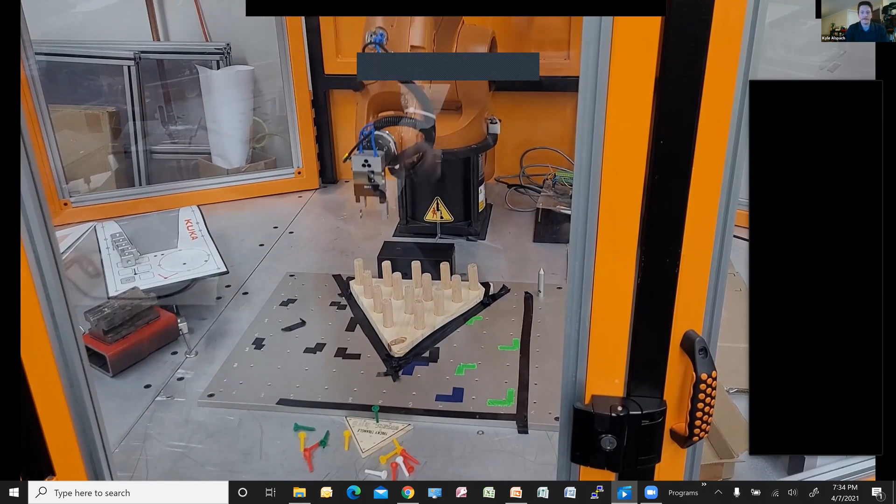Hello, folks, and welcome to the Winter 2021 Robotics Championship. I'm your host, Kyle Allspa. We are coming to you live from the Robotics Lab at Oakland University, where we had the last match of the semifinal round. Let's get into it. The semifinal round is a puzzle round where the robot arm must solve the tricky triangle puzzle.

Kyle, you have to unmute your mic.

R700 is off to a great start, working through the top half of the puzzle first to make room for the bottom half, a brilliant strategy. Now keep in mind, folks, the KUKA absolutely needs to end up with 1 peg left on the board in order to beat out the FANUC arm and advance to the final round against ABB. The KUKA robot makes it look easy, though, just gripping away and putting those pegs down with authority. It doesn't fear a yellow painted robot arm. It doesn't need to say anything. Its moves are doing the talking.

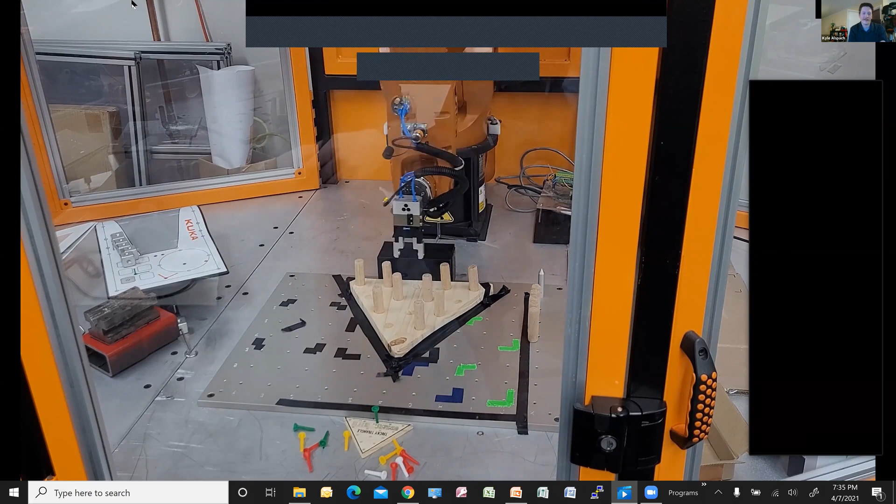They're saying, you better be scared, FANUC, and I'll be seeing you in the finals, ABB, moving with precise, fluid motions. The KUKA is absolutely just crushing this semifinal round. It's saying, oh, this challenge? This is just another day in the office for me, chief. The KUKA is just blowing away the competition, leaving everything in its dust. It has no remorse. It will not apologize to no one, man, nor robot.

Group 6 is feeling confident their robot will end this round with the win and face their rival, ABB, in the final round. They have come a long way to get where they are at, so failure is not an option for them at this point. Coming down to the last few pegs of the puzzle, it is looking like a real nail-biter, folks. Will the KUKA get to the coveted one peg left, or will FANUC get a chance to force a tiebreaker between the two? Time will tell with these last few moves.

Leaving nothing to chance, the KUKA makes it apparent that it knows what it is doing. This last jump means that the KUKA has just won the semifinal round, and boom goes the dynamite into the last slot. The peg goes. The crowd is cheering. The KUKA knocks down the pegs like dominoes.

Well, that's it for us here today. Tune in tomorrow night to watch the Robotics Championship final to witness KUKA and ABB duke it out in a game of Rock'em Sock'em Robots to determine the winner of the 2021 RoboCup.

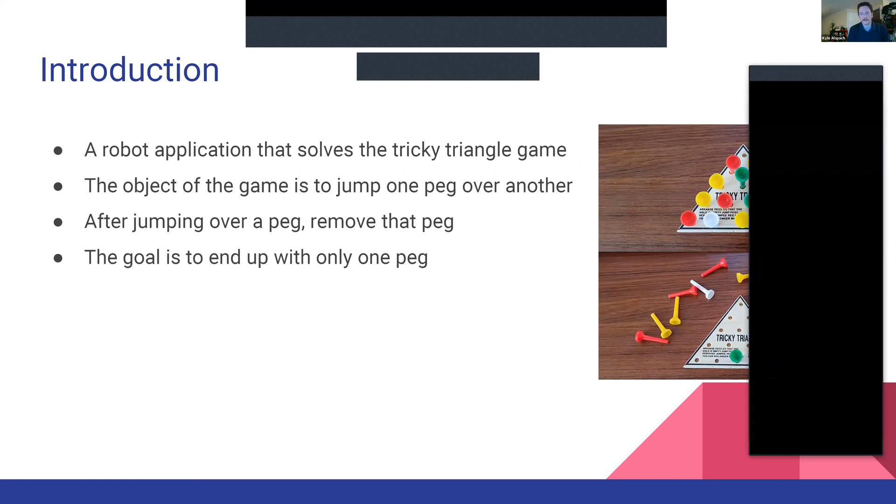So a little introduction. If you're not familiar, the tricky triangle is a small handheld puzzle with the goal of jumping pegs over each other into empty slots and removing those jumped pegs, ultimately ending up with one peg left. You may have seen this game from your grandparents, or maybe if you've ever been to Cracker Barrel, those games are always on the table.

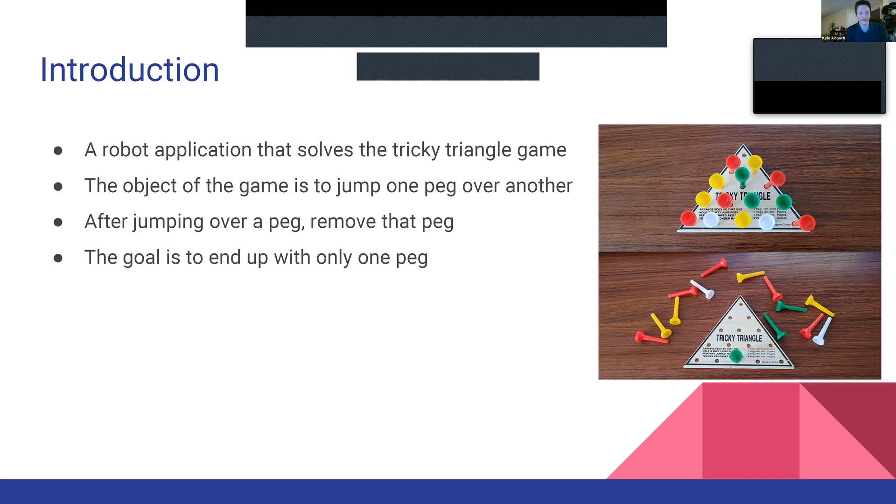So with that, the goal was, how do we get this into an application where a robot such as the KUKA could easily grip each peg and put them down. So we decided to blow it up to a decent sized board where the robot arm could easily maneuver through pieces and the gripper would not get in the way of each peg.

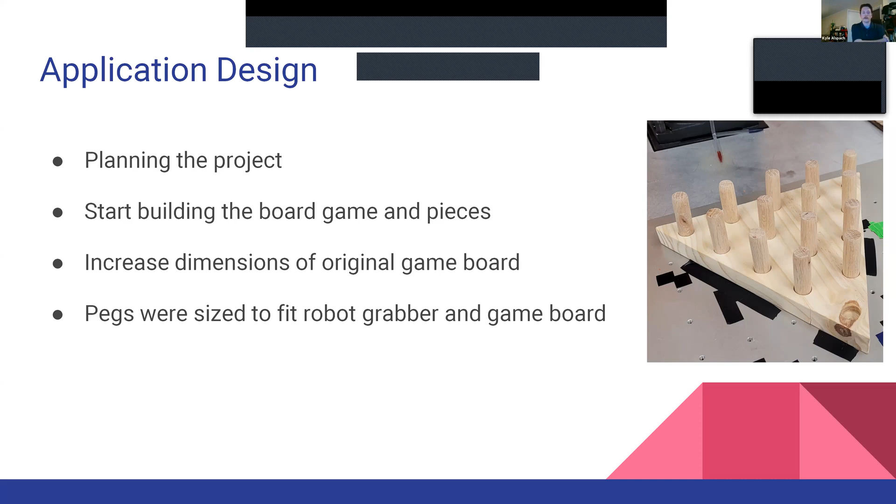And so with that, we went to the hardware store, drilled 15 holes as symmetrically as possible given our tools. You'll see later on how this rough iteration of the game board caused some issues with repeating the process once we got down with the programming. So with that, I'm going to turn it over to Lucas.

Yeah, so for programming the robot, we started the KUKA robot at the home position, and the movement was controlled by the teach pendant. We moved the robot arm in the world frame from peg to peg, and every single one of those moves was a specific position that we had to save at every single point — like when it went over the piece, when it went down by the piece, when it grabbed the piece, lifted it up, over, down. It was pretty tedious, making sure we saved all those pieces.

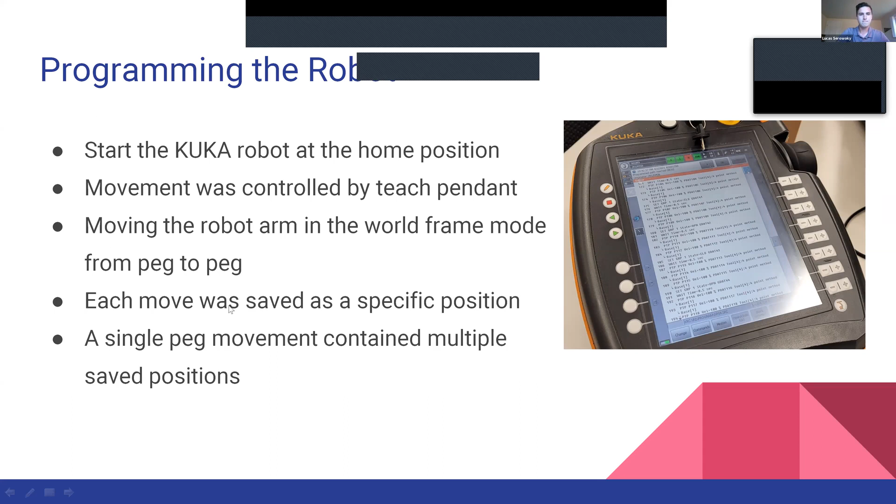The tool piece is kind of like a horseshoe shape. And when you're grabbing it, it was kind of like grabbing with chopsticks at first, because on the lower part of the tool there were some screws on the inside. When you grab the piece, it would rock back and forth — it wouldn't necessarily always grab the best spot inside of there.

After trying it out a couple times and saving all the code, we finally decided it would be better off to use the upper half of the tool piece, which was squared off, and that made it uniform. So every single time we went over to grab the piece, it would make sure we grabbed it from the same spot every single time.

Some of the board tolerances — Kyle's a great woods craftsman, but it's not perfect doing it by hand for every single one of those pieces. He thought about even getting a drill from Harbor Freight or something, but decided not to. We had to tape the board down to prevent it from moving around when we were grabbing each of the pieces, and quite a bit of time was needed to complete the puzzle.

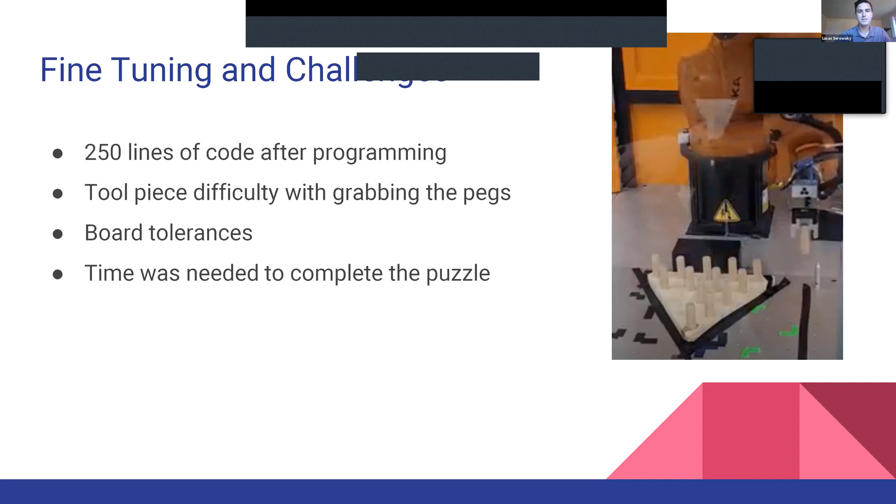Next slide, please. Yeah, so for executing the program, there are many different ways to solve the tricky triangle game, but we used the most popular solution, which involved the least amount of steps. So, for example, we numbered each of the pieces and said, like, piece 1 jumps over piece 2, take out piece 2. Throughout that whole process, we had to save every single one of those spots.

And like in the real world, there's always difficulties. You just gotta go with the flow, adjust, react, and be able to solve the problem at hand. For the KUKA robot, we all enjoyed working on it. It's very straightforward, and it was nice with the XYZ, being able to go left, right, front, back within each of the frames, going from forward kinematics to inverse kinematics, grabbing each of the pieces and stacking them all up in line so we could finally knock them all down.

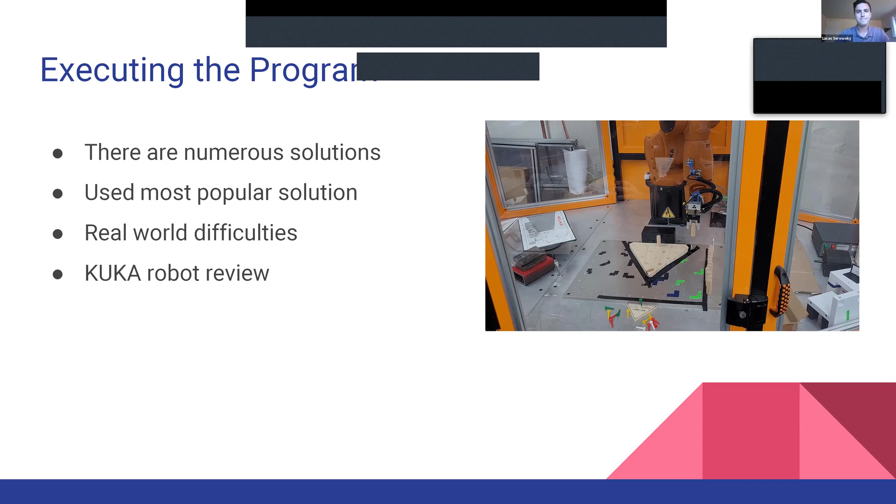So I'm going to talk about improving the application. After finishing the project, we went back and talked about what we could have revised about the building process.

The problem was, as we mentioned, the board itself. It was not built with a good tolerance. If we had more time, we could have built it with better tolerance and reduced the difficulty of movement to set up the peg in the right place.

Also, the speed of the robot was one of the problems we had. If the speed of the robot on manual control was as fast as it was on auto control, that would ease up the movement of the robot to solve the game. While we were programming, we used manual control, but when we tried the whole process, we used auto, and it was a completely different speed. Like when it was set to 100 speed, it was still slow on manual, but when we switched it to auto mode, that made it way easier and faster to solve the game.

Another point is the point of view. If there was an option of adding a camera on top of the gripper, or a camera over the work area, that would ease up the vision of the movement, because our problem was that the hole was so small, and as we mentioned, we had trouble fitting them together. So while the robot was moving, we had trouble seeing where the gripper was moving and if it was in the right position to set up the peg in the hole.

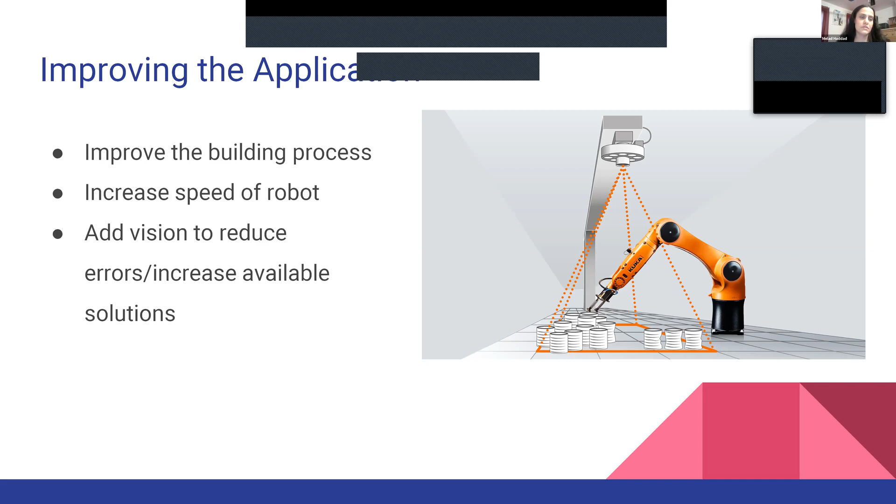At the conclusion, the way we pursued the program gave us a better understanding and good knowledge of how robots work. During the process we passed through some challenges as usual, but in the end the application was accomplished. The project was a great observation of how to approach a program using a robot in a real world situation.

Overall, it was a great opportunity and a nice experience to be able to create an application from scratch and use a robot to solve it. When we started, we just had an idea, we built it up, went to the lab, tried many times, had some difficulties, and ended up finishing the project with a really good experience and a nice learning outcome. That gave us a really good vision of how we can use the robot in any application we can think of and resolve it, whether it's small or big.

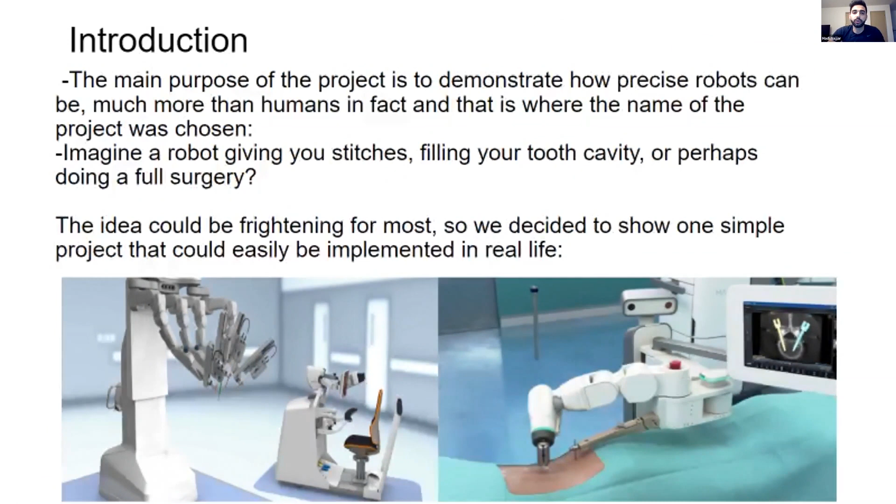The main purpose of this project is we wanted to prove once again that robots are much more precise than humans are. I know you all trust driving a car or whatever, but how about thinking about someone other than a human being giving you stitches, or a robot digging in your mouth filling a tooth cavity? I know it might not sound very pleasant, but we might change your mind after showing you this project, hopefully. So we decided to show you one simple example, and we're going to tell you what we'll be mimicking in a second.

One of the main reasons we thought of this project is because we realized that medical mistakes are actually the third leading cause of death in the United States. Part of these deaths is due to imprecise usage of medical equipment by surgeons while they're doing the surgery. So we wanted to talk about this before we show you the video demo, just so you can relate to what we're talking about.

The project we're doing kind of mimics what's called an angiogram. An angiogram is pretty much a catheter that's inserted into the blood vessels, mainly the arteries, and it goes all the way to a certain part of the area. It's very common in the heart. This type of angiogram has a catheter that goes in and navigates through the blood vessels all the way to a certain place, and then the surgeon has to pull it back out. If you look at this simple figure, you can see how long the actual path could be. And when working on a smaller scale, like micro or nano, this becomes much harder to be precise. So you can imagine how precise someone has to be and how steady the catheter has to be going in and out.

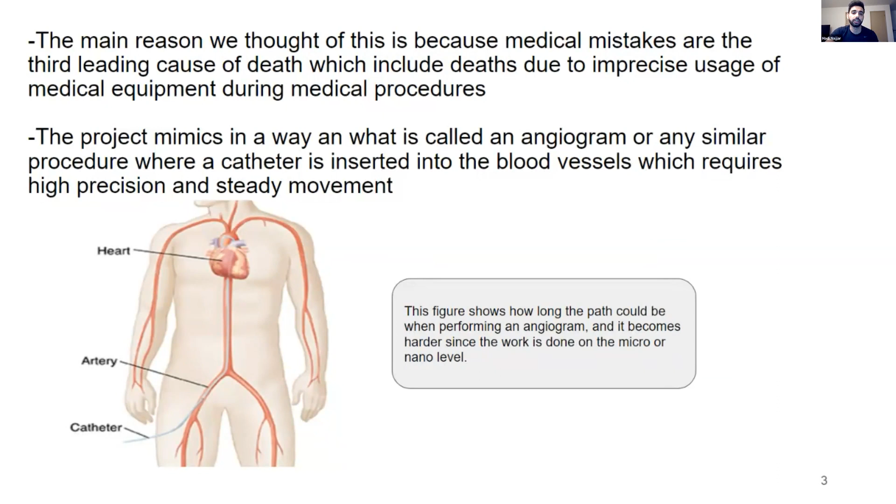So like we said, we decided to mimic this in a way. We had two main parts of this robot: a tool with kind of a spiral and linear shape that's guided through a ring that's steady in its place. And at the end of it, we decided to put some dominoes and knock them down, just to prove our success, I guess. So we're going to go ahead and show you our demo to show you how this robot is going to work.

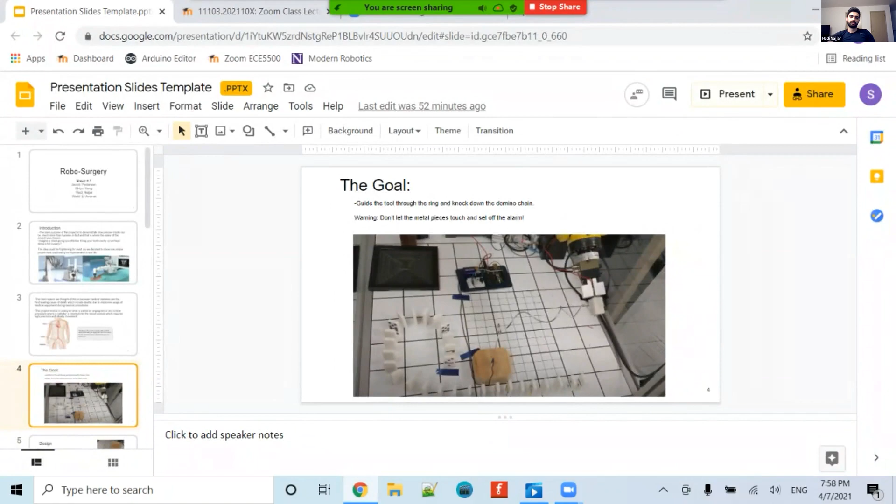All right, so that was our video. I'm just going to talk to you guys a little bit about the design, kind of what went into the background of getting this to happen.

You can see in the picture on top, there's our tool on the left and the target on the right. The tool is basically a piece of wire bent with a spiral and a zigzag, which we had to guide through the ring. And you can see in the picture on the bottom that the tool is mounted at a 90-degree angle to the last joint of the robot.

It took a little bit of playing around to figure out how to hold it so that we would have the most flexibility, so that we could avoid the singularities while guiding the tool through the target.

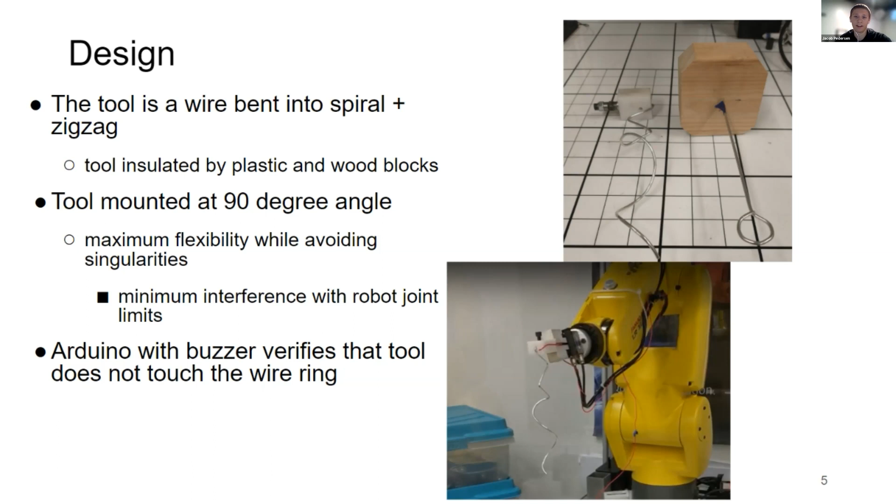Also, if you notice in the picture on the bottom, the red wire running from the tool down to the base of the robot is connected to an Arduino, which is hooked up to a buzzer to verify that we don't bump the tool to the ring as we go through. Also, you can notice how the tool has a plastic block to insulate it from the robot.

So here's just kind of a flow chart of basically what our program does. We start in the home position, and then we bump the tool to the target to make sure the alarm is working.

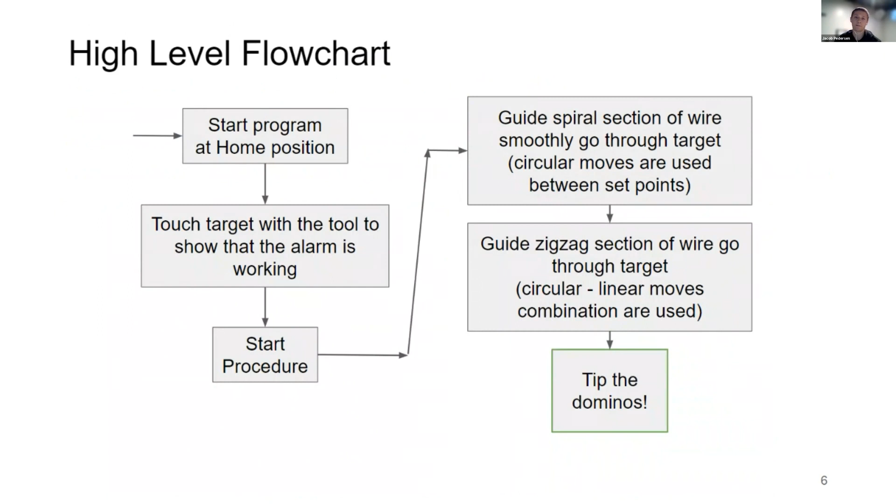As we start the procedure, we use circular moves to guide the wire through the curved sections, and then we use straight or linear moves to guide the straight sections through the ring. Once we're all the way through, we can tip over the dominoes.

So how we programmed this: basically we just had to manually drive this tool through the ring with the teach pendant and record lots of points, as you can imagine. Like I already mentioned, we used linear moves for the straight sections and circular moves while going from point to point, changing orientation through the spiral.

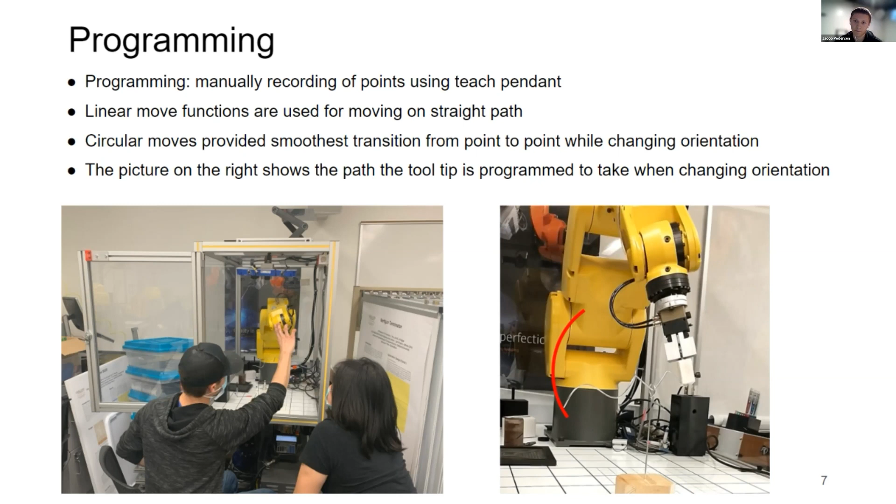The next will be the code that we use going through the spiral section. As you can see, most of it is us using the circular move.

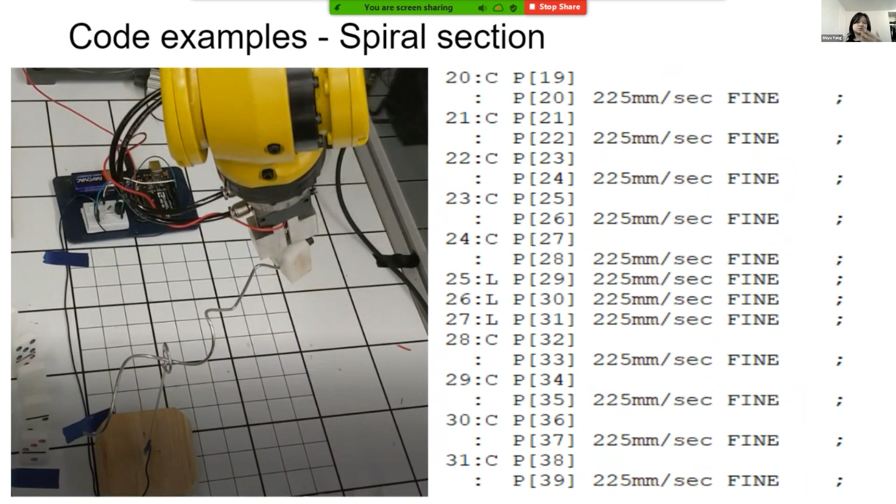And the next one will be the zigzag section. We pretty much use a combination — rotating from linear move to circular move, and then circular back to linear, stuff like that.

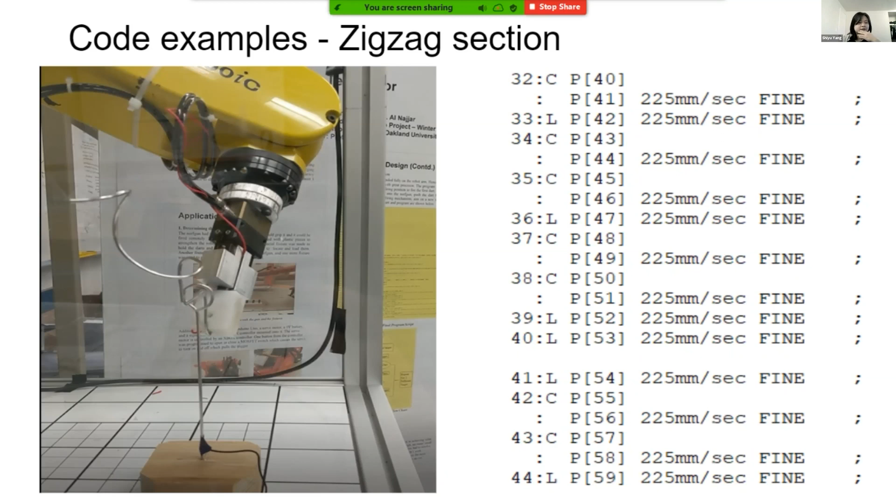And these are showing all the positions that we programmed. We skip a little bit, but you can see from point 1 all the way to point 59, we have so many points programmed.

So as an observation, I believe the demonstration video pretty much shows that the robot motion is very smooth, precise, and stable, as we do hope this can be a real medical application.

Setting multiple points in circular motion works just great for nonlinear path scenarios, like what we did for the spiral. Also, changing the tooltip points helps the robot move more precisely around a specific center — that's actually what we did for the zigzag section. We just end up rotating around where it turns.

And also, due to the robot's joint limits and singularity, the initial position of each joint must be carefully considered during the design phase, just to maximize the running distance along all directions and the rotating angle of each joint.

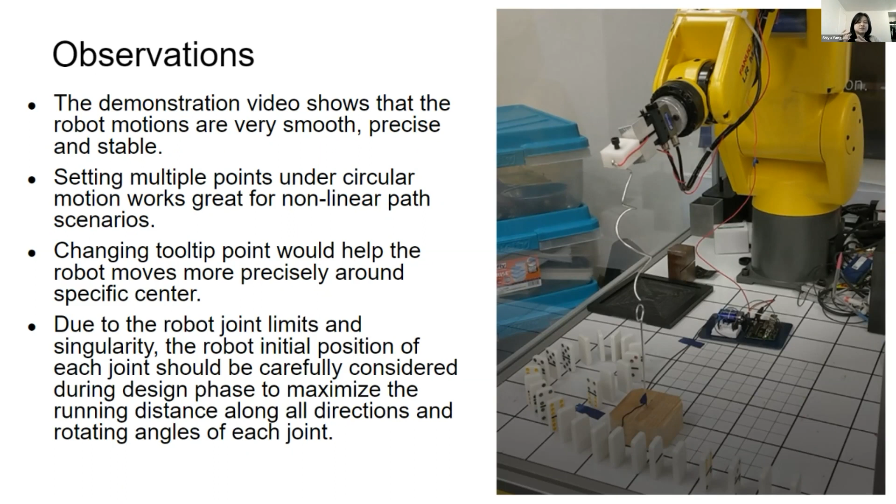All right, I'm going to pass it to Valid.

As a conclusion, we can say that we were able to achieve the main purpose, which is to guide the tool through the ring and knock down the dominoes chain. The project shows high precision and accuracy when entering the wire ring.

This project helped us apply the concepts we used and learned during the semester, and gave us the opportunity to get familiar with the use of the teach pendant. The project emphasized the idea that robots can be easily programmed by saving the points of the desired path to automate the process.

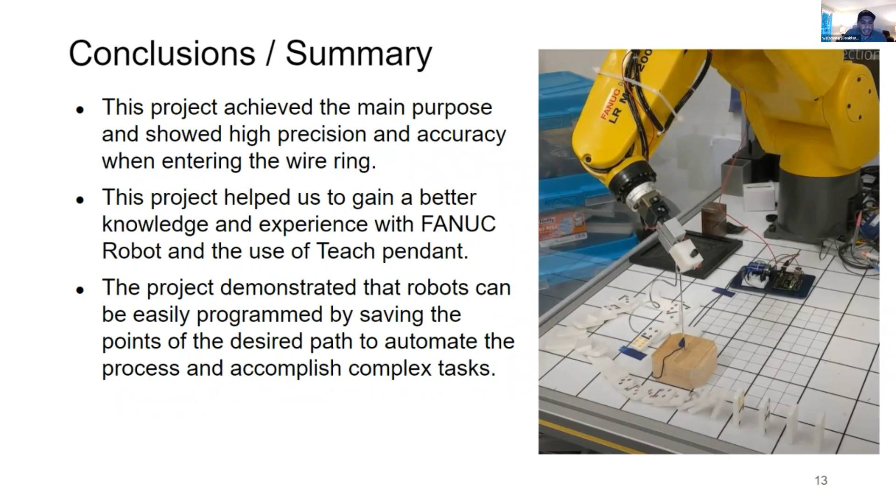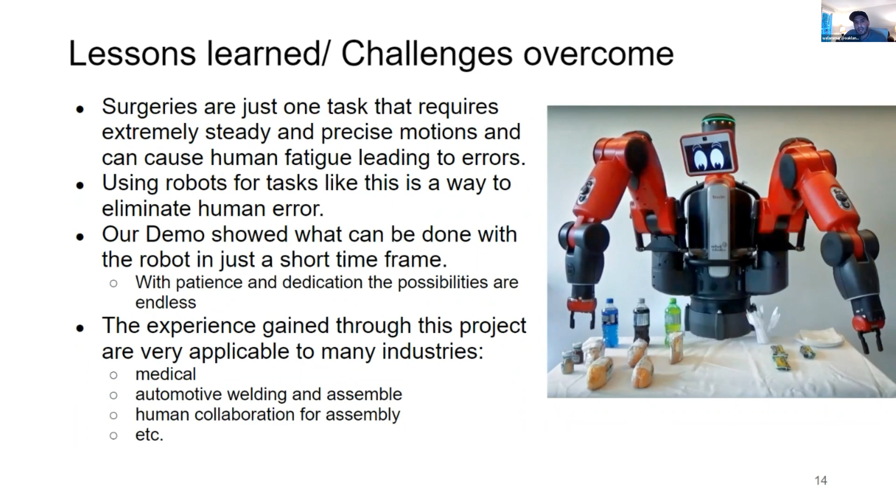Some of the lessons we learned and challenges we overcame during the project: using robots for complicated tasks is a way to eliminate human errors and mistakes that can occur, and robots can accomplish many tasks in a very short time frame. Finally, a lot of experience was gained during this project, and it can be used in many industries such as the medical field, automotive welding and assembly, and human collaboration for assembly. Thank you guys for watching, and any questions?

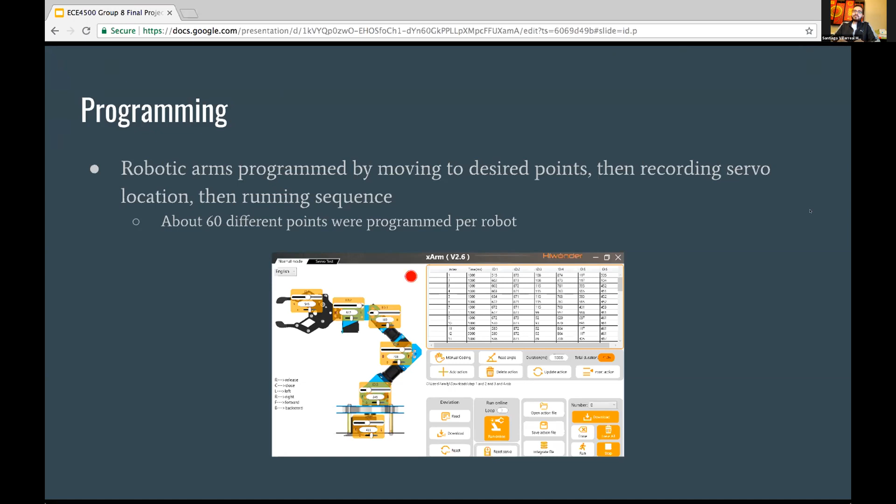To program the robotic arms, we use the software that came with these robots. To program each robotic arm, we move the arms to the desired points and then recorded the servo angles in the software. Then we just ran the sequence, making sure to include all the delays necessary for each arm to make each chess move. In total, we recorded about 60 different points for each robotic arm.

The workspace for these robots was a 9x9-inch chessboard. Originally, we wanted to use a bigger board, but due to the size of the robots, we had to stick with a smaller board, which made it a bit challenging when trying to pick up the pieces without knocking over the other pieces on the board.

We didn't make any modifications to the end effector tool. We thought we might need to add some half cylinders to the grippers, but the gripper in the robot was sufficient to pick up all the pieces.

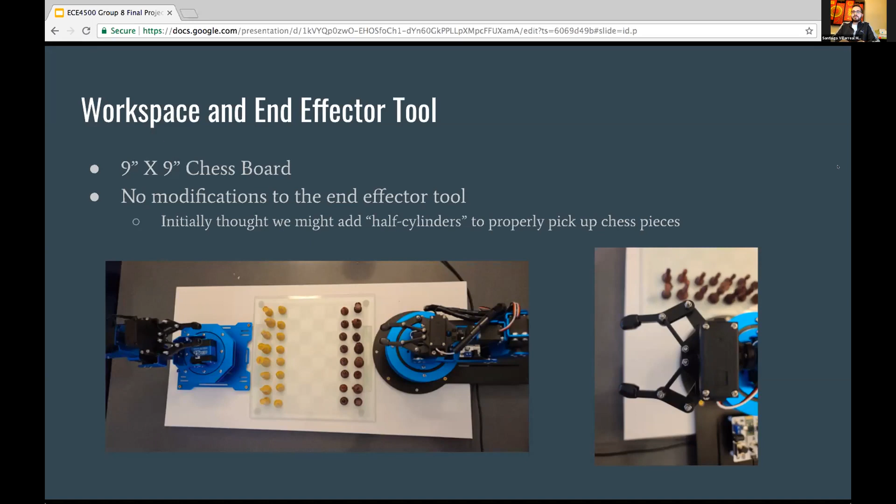And I'll hand it over to Rami to talk about the challenges.

Thank you, Santiago. So of course, with every great project, there are some challenges that come along. One challenge is that the tabletop robot was not built for precision. We're handling very small pieces that we're trying to pick up and place in a specific spot, so it wasn't precise enough to be able to pick it up every single time from the same spot.

Another challenge was hardware, which kept getting loose after running trials on it. It's just from the vibration, and from the trials, it was becoming loose. It was difficult to repeat a step in the same position, because the robot is not very precise, and also the hardware kept coming loose, which made the gap for tolerance error a lot bigger, causing more shaking and more play in the arm.

Another challenge is the size of the robot. We weren't able to reach all the way across the board without knocking down some of the pieces in the front.

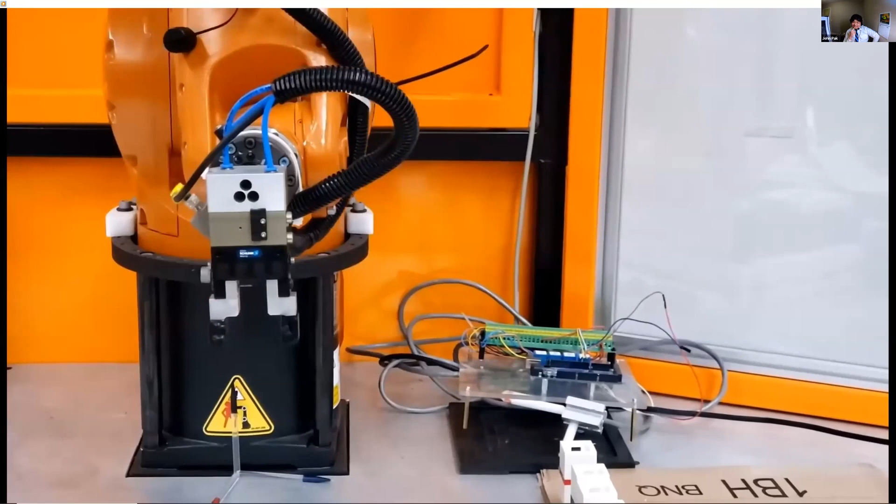Good pickup. Two in a row.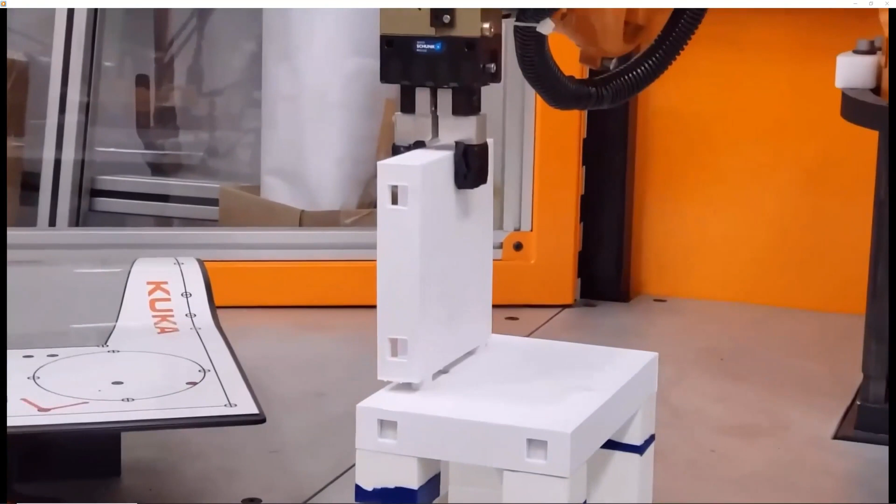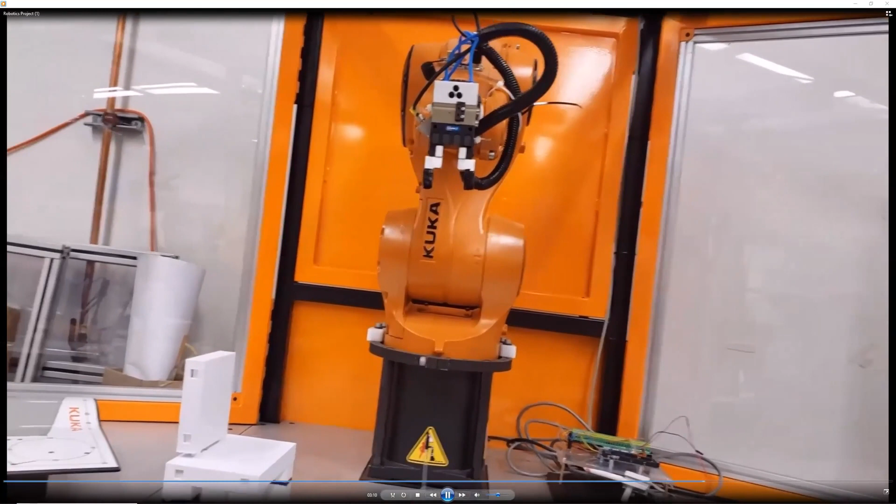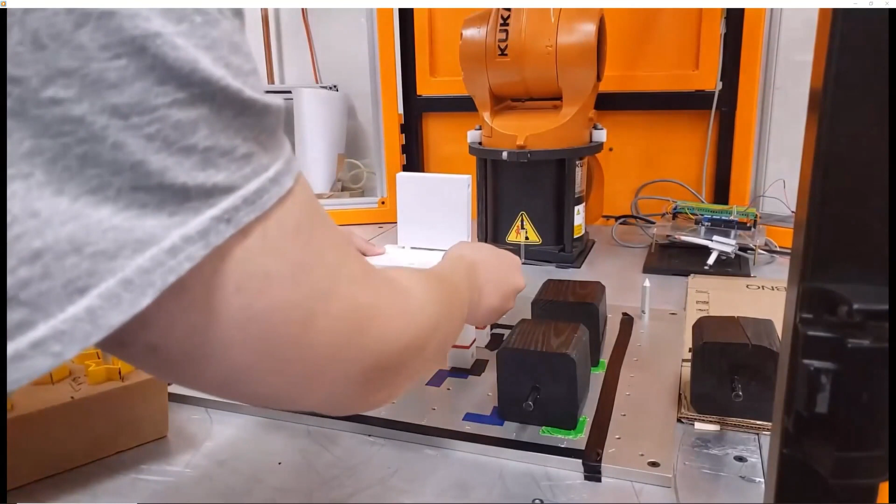Perfect! No! God, please, no! No!

Well, I certainly hope everyone enjoyed that. Especially, I especially hope Professor Mirza enjoyed that last bit.

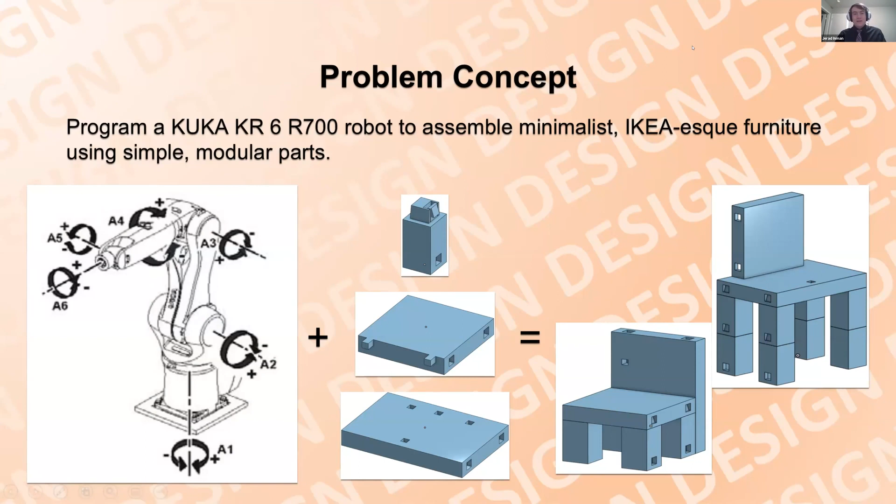When it comes to designing any of these projects, first you need to clearly establish what your problem is. In this case, we wanted to take some simple modular parts and construct them into minimalist furniture, kind of in the vein of what you'd find in IKEA or some other simple furniture assembly. When choosing our robot, we were looking for the one with the biggest workspace, and the KUKA robot available to us seemed to have the largest workspace so we could really assemble a large piece of furniture.

The constraints come now that we've established our problem. In this case, we have problem-based constraints, which are constraints we invented ourselves, and robot-based constraints, which are for the most part out of our control.

With problem-based constraints, there are quite a few, but quickly: we need quick assembly and modular parts, since that was our general goal of replicating IKEA-type furniture. We needed rigid connections because the furniture can't fall apart, but also needed to disassemble the pieces since they're test pieces we'll assemble and disassemble several times. We also needed to be able to 3D print these parts, since that's the best construction option available to us, and it needs to be small scale since we can't build entire tables inside this small robot workspace.

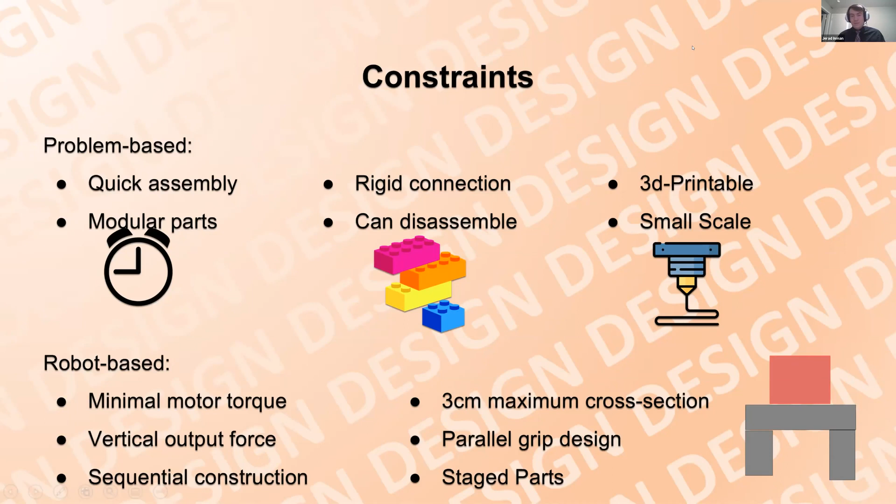Speaking of the robot, we had several constraints relating to it as well. We needed minimal motor torque, because too much torque on the servos causes them to fault out, which we experienced firsthand. We had to use vertical output force, since there was no other way to put out force besides pushing things into the workspace floor. We needed sequential construction, since that's how a robot program works. The gripper design was parallel, with a 3 centimeter maximum cross section. And since we don't have vision with this robot implementation, we needed staged parts that were very consistent.

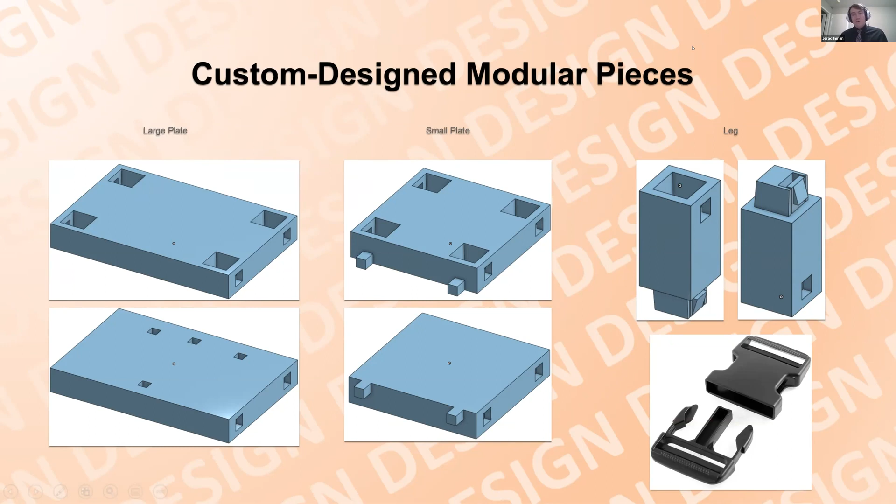All of that basically sums up to us having to design our stuff ourselves, since nothing was going to fit every single one of those constraints. We ended up using Onshape to design these pieces. Generally, we have a large plate, a small plate, and legs, and that's what we used to construct everything. The small plate can connect to the large plate in a couple of different orientations using small friction-held pegs. The legs connect into the bottom of both types of plates using a buckle-type design, and they also have a taper on top so we have some tolerance when connecting them. Otherwise, it would be more or less impossible to design quickly.

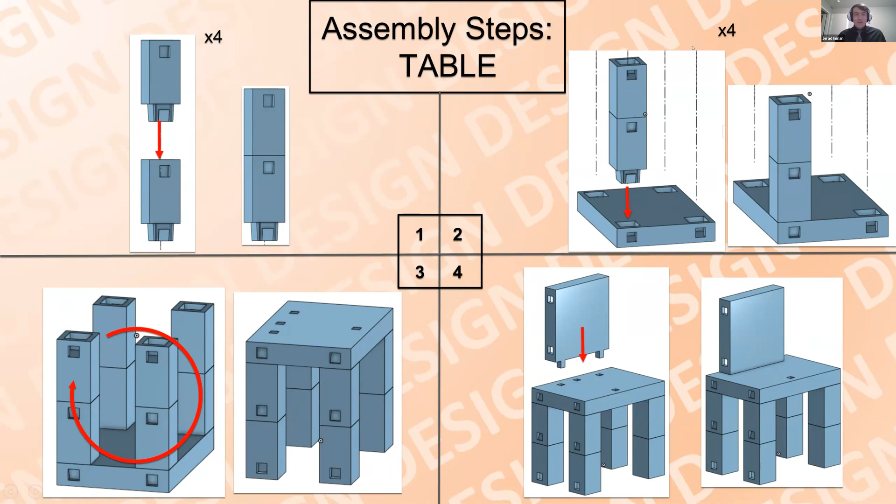With all of our parts designed and printed ourselves, we had to establish some assembly steps. We designed these with the robot in mind, using only vertical forces. This is kind of like what you'd see in a furniture kit you'd buy — just a few simple steps to assemble it. We wrote assembly steps for both the table and the chair.

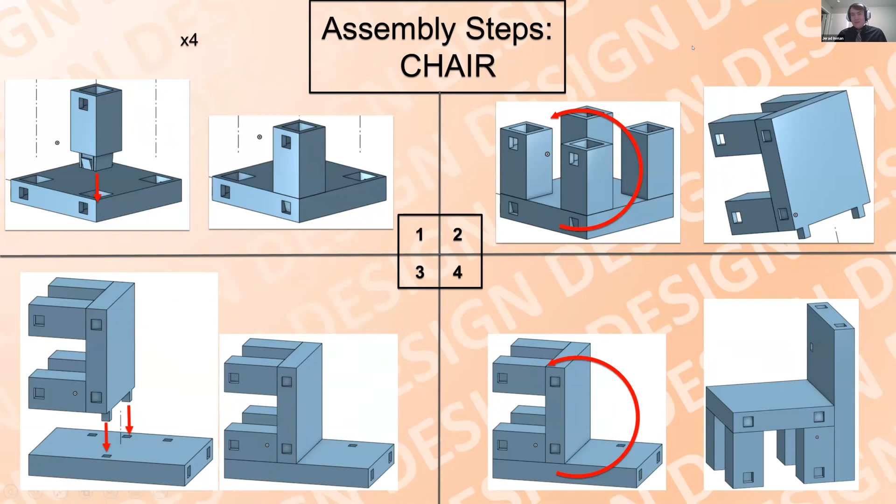But unfortunately, as you saw in the video, we did not showcase assembling the chair. John is going to talk about why that is, in addition to some of the other revisions we had to implement before we could execute the program.

Take it away, John. Thank you, Jared. Well, as he mentioned, not everything went well according to plan at first, but after a few minor hiccups we were able to fix these issues, hence why we are presenting these before you.

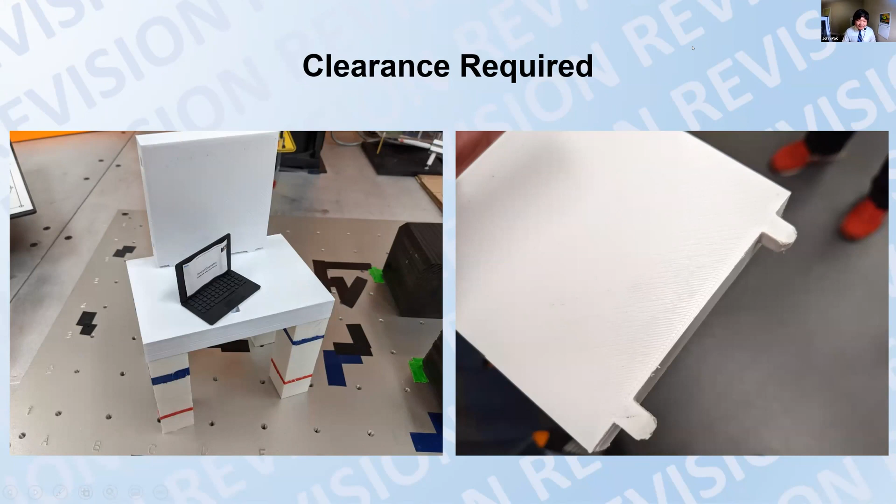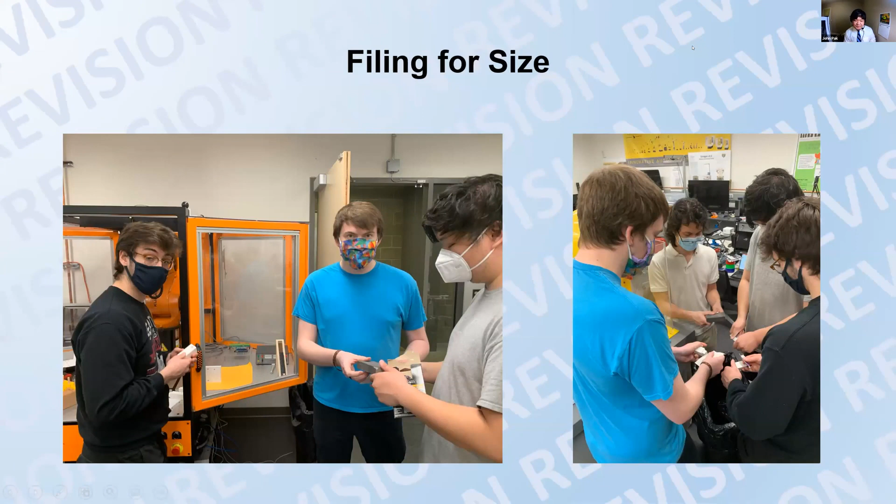Our first problem was the construction of the table. It just would not fit perfectly the first time around, like how everything is in life. So we had to sand the pieces down so that they would fit, and here's a short clip of us actually sanding it down.

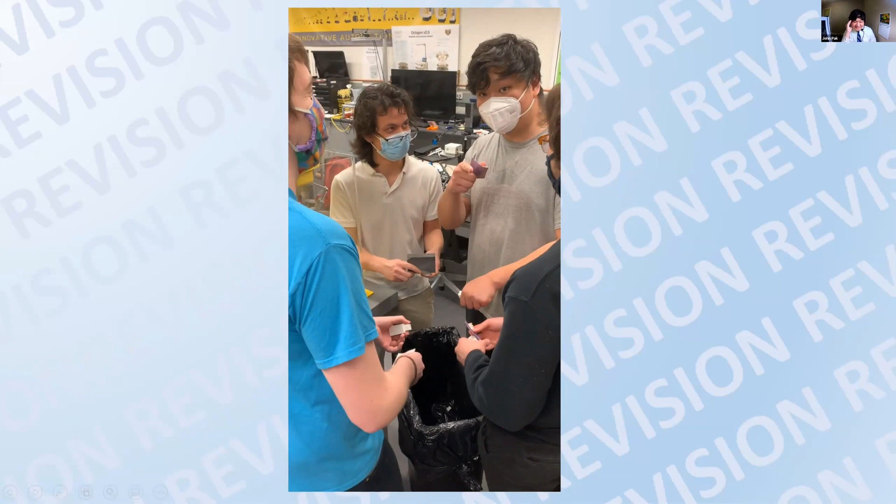This is quite sad. That would be great, wouldn't it? Like at the end of our presentation, just have a blooper reel of us. Hilarious, yes, I know.

The next course of action was the tool frame, because the screws in the gripper just had to go. They were very inconsistent and would scratch our material, so they had to be replaced by electric tape, which our lovely TA provided for us during that day in the lab. As you can see, we just had to replace it here.

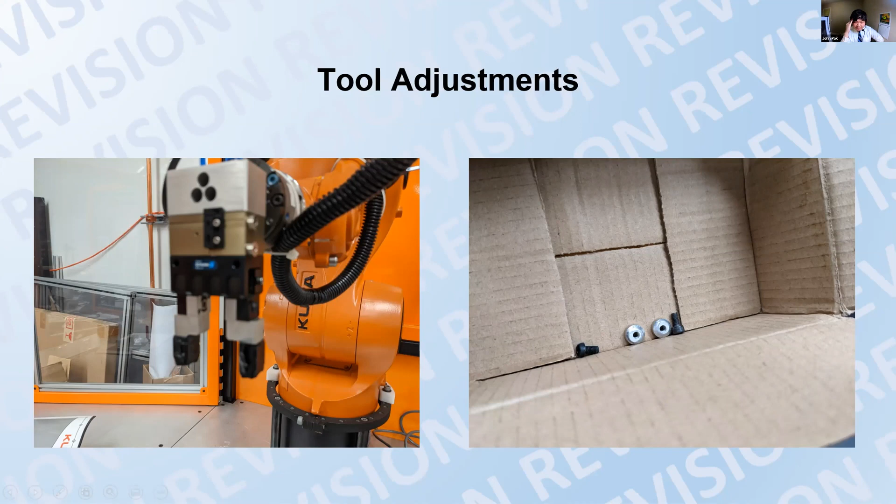Speaking of tape, it served well not only for providing thickness but also for the playground. Our first plan of action was to design a cardboard cutout to strategically place specific parts in order to construct the table the way we wanted to, without much hassle, worry, or risk of hitting the robot to the ground or crushing the pieces.

Unfortunately, that happened one too many times from our experiences in the lab. Another purpose the tape served was to mark the designated areas, as you can see on the right, where we would place our parts for the robot to work in, the workspace for it to work in.

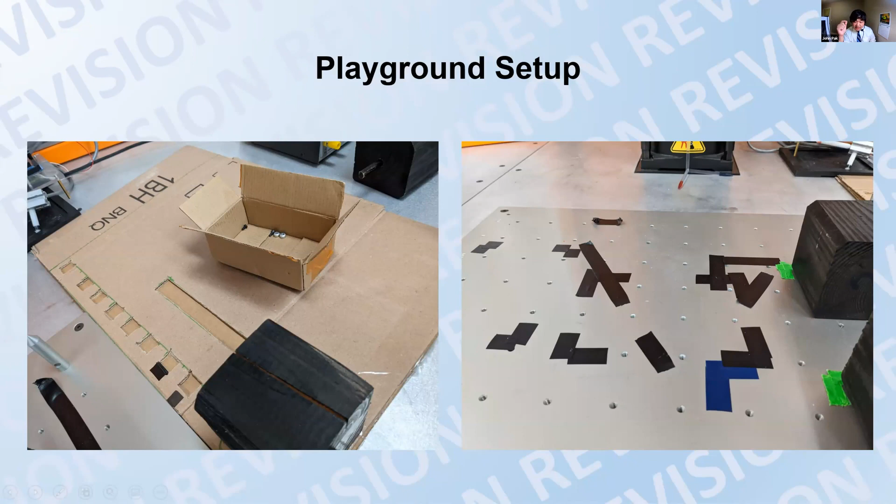Last but not least, the timing of everything was just not in our favor. We had this bold vision, as Jared said, to show off our exquisite furniture builder by building a chair also. Unfortunately, due to time constraints we experienced, whether individual schedules, printing problems, group malfunction, etc., we still got through to bring you folks this beautiful, delicate product and made do with the best that we have.

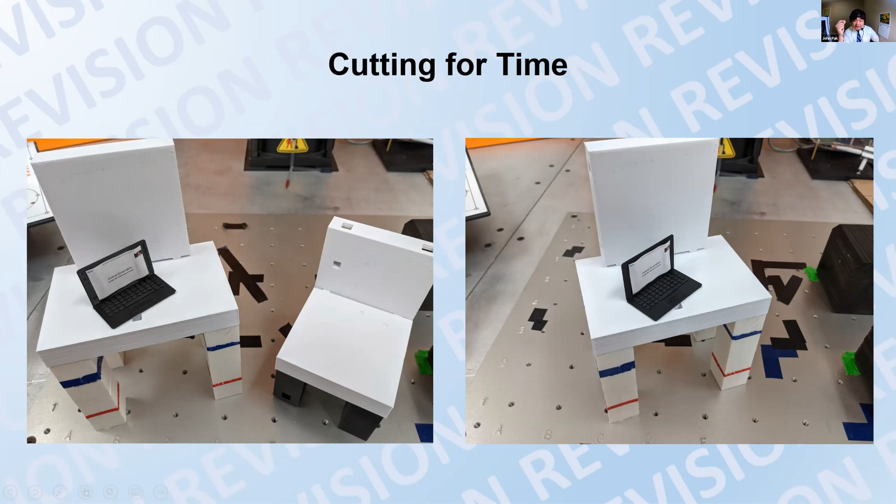The layout of all these pieces was extremely important because, as Jared mentioned earlier, there wasn't a vision function for this robot, so everything had to be precisely where it should be and extremely repeatable. So in one of the slides John was talking about, we had our cardboard cutout with incisions throughout it for each of the leg pieces, the tabletop, and the vanity mirror, to sit in securely exactly where they needed to be while the program was running.

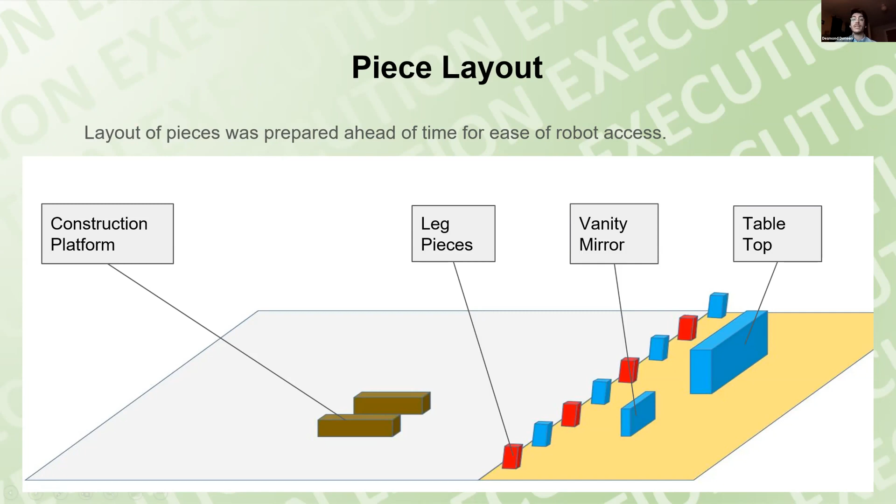Another step we took towards making sure this project went successfully was having a very specific order of operations for our robot. As Jared mentioned, the only way we could conceive to stick pieces together was to push them down with each other, like square pegs going into square holes. So we thought it'd be kind of ridiculous to try to do it any other way than to just stack them and push them down.

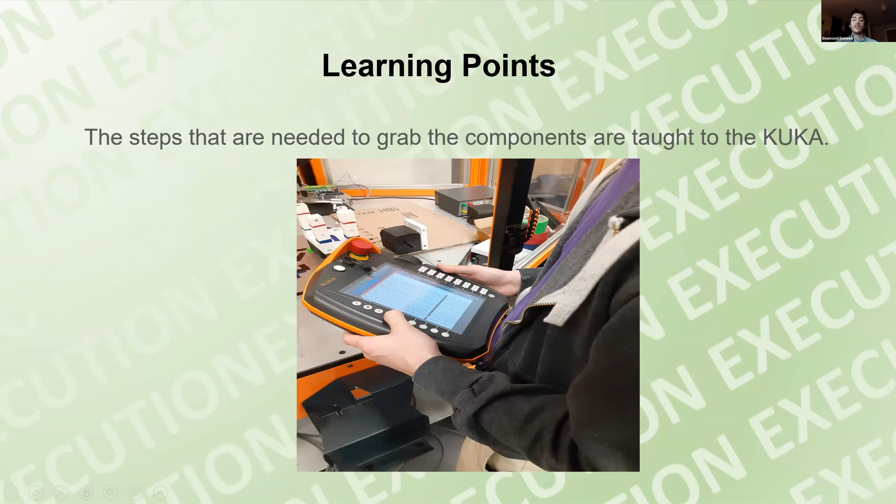Next slide, please. So after we had our playground set up and we had our plan of action kind of in our brains, the next thing we wanted to do was teach the robot all the different points it had to go through. As I'm sure lots of you guys found out in your projects, this is very tedious to go point to point to point and write in the gripper moves and all the different steps you have to take to place and construct something.

So next up we have Victor, and he's going to talk about various applications for this robot.

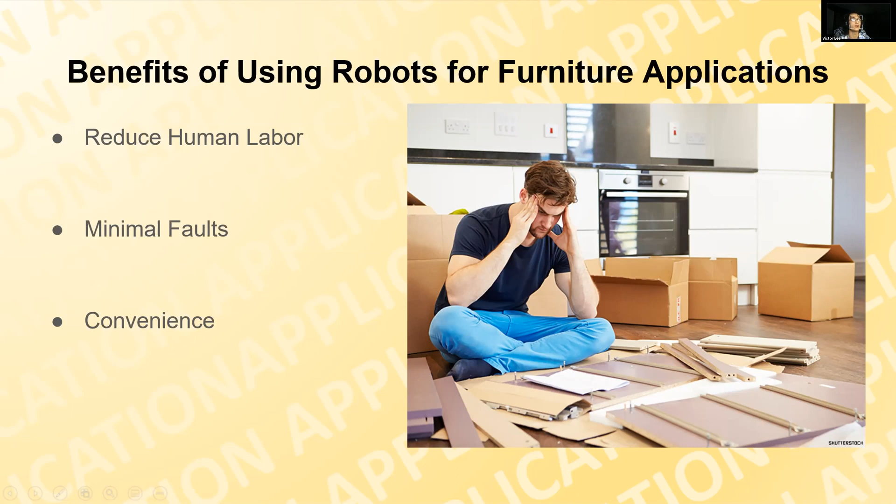Okay, so first off, I want to talk about the benefits of using a robot for furniture applications. You probably hear this a lot, but robots can be used to replace humans, and in this case, to replace human assembly of furniture. This would allow human labor to be reallocated and save money on at least this application. In place of the physical labor of assembly, more technical skills can be introduced, such as robot maintenance and programming. Using a robot would also result in minimal faults, which could come from human error, because unlike humans, robots are more precise, and with proper maintenance, very unlikely to make mistakes. Robots are also convenient since they are automated, because no one likes to do miscellaneous tasks—it can be grueling and annoying.

Okay, next slide please. All right, so typically when using a robot to construct objects, multiple robots are necessary, such as one robot to hold a part and another to fasten it. And when constructing different objects, typically each object needs its own robot. Since we're using these robots with modular parts, a single robot can be used to construct any furniture—hence, one robot for all. So if we use fewer robots, we don't need to purchase and maintain as many robots for the same job, ultimately saving the company money. With fewer robots, there's also less space taken up, which goes hand in hand with saving costs, since smaller facilities will need to be built rather than larger ones.

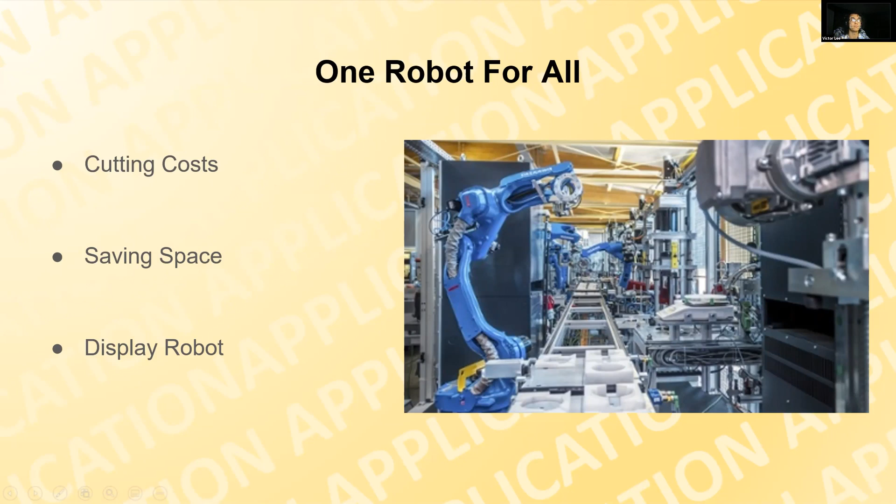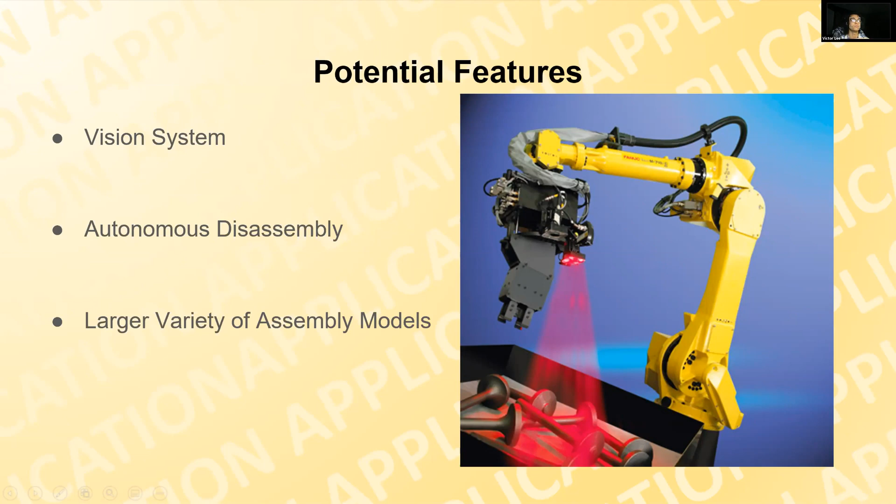We could also use the robot as a display, using it as long as we design the modular parts, at conventions and demonstrations. And as for potential features, if a vision system was applied to the robot, more features would be available, such as less staging required for the modules. With a vision system, a module can be picked up from any orientation and identified to fit the sequence. Currently, the modules are designed to easily assemble; however, they could also be designed for a robot to disassemble. This would allow us to recycle and reuse modules for different models, and could also introduce autonomously repairing the models. At the moment, the robot is only capable of assembling a chair and table, but more models can be designed to be constructed, such as dressers or beds.

And that's all we have for you today. I would like to open the floor for any questions.

Good job, Group 9. Good demo, good presentation.

All right, so before we open for questions, I do have a special inverse kinematic assignment for your group right after this. I can't say I didn't expect it.

I love the music in the demo video. Is that Swedish music or what? I'm not really sure, just some elevator music to set the mood. Curb Your Enthusiasm? Oh yeah, that as well.

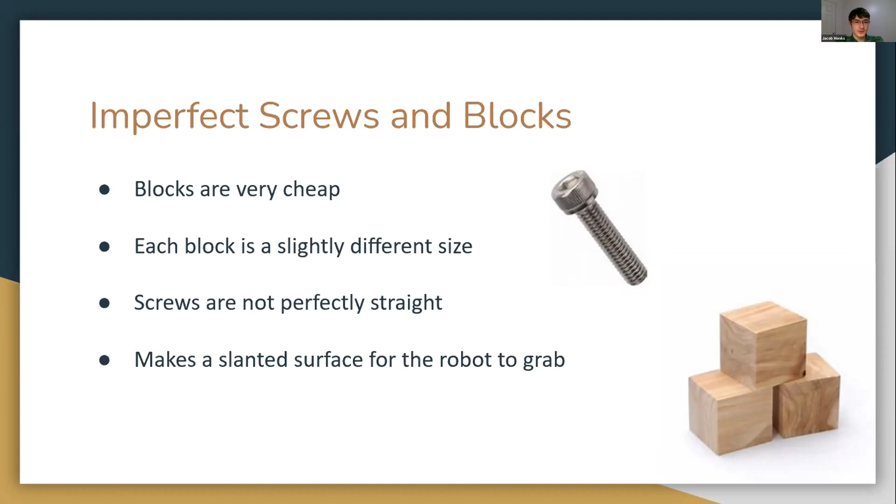To get past these problems, we decided to glue the blocks together. Not only does it make it easier to form the Mario image, it saves a lot of time on the project. It also let us show much more motion with the robot, like added rotation with the blocks.

For example, in the Mario image from left to right, we added rotation. Sometimes we had to reset the arm to make sure the wire on top didn't get pulled and yanked and ruined.

Our basic outline for each block placement: start at home position, move down, grab the black screw from the block, move vertically, move to the placement point for that specific block, add rotation if necessary, move down to ground, release gripper, move vertically, move to the next block, and repeat the cycle.

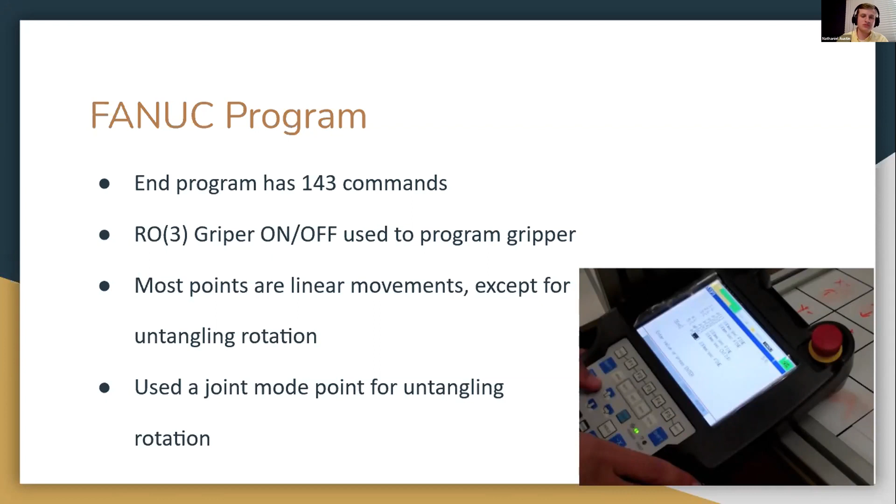Next time, if we were to improve this project, we would definitely buy some better components, because those blocks being off were not helping at all. We would also make sure that the screws are all at the exact same angle and height. We would make smoother movements for the robot to move, so that way the program would go quicker. And then we would also have a special frame to hold the blocks when picking them up, so we wouldn't have to devise that method of using the phone to set up the blocks each time.

And also, if you like, for an added bonus, you could do vision tracking, so you could just have stacks of colored blocks for the robot to pick up and place as it sees fit. And that's about it. Do you have any questions for us?

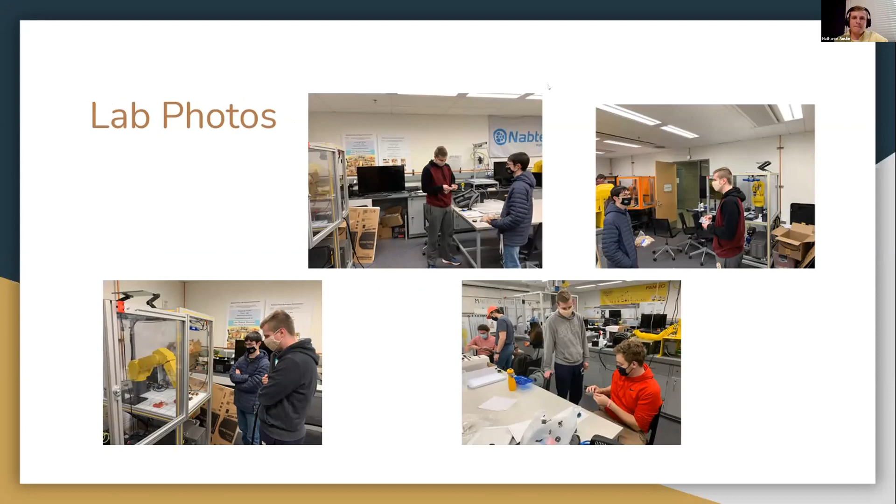Okay, well, I have to mention that the robots in the lab, the speed is limited just for the safety of students, and these robots can fly, they can move very fast. But we have limits placed on all the speeds so that all the motion is safe, especially when students are learning about it. So that's one of the things about some of the demos which look slow. In reality, you're waiting for things to happen, but these robots in automatic mode can move very fast. All right, questions guys for this group?

Nobody likes Mario? What? I was going to ask, what's your favorite Mario game? The only one I ever played was Mario Galaxy. Right now I'm playing all three, I got the remake for the Switch, it's pretty fun. If I had to pick one, it would probably be Super Mario Galaxy, but I also have a soft spot for Super Mario 64 since that's the one I grew up with.